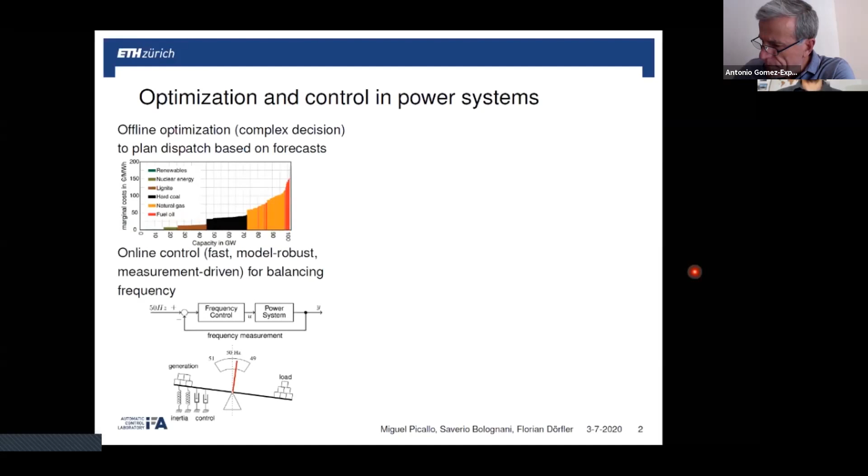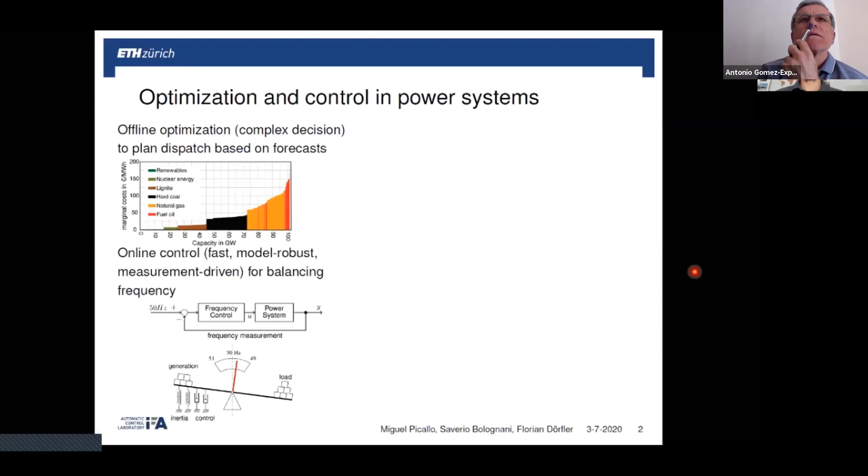There are many examples of optimization and control in power systems. For offline optimization, which consists on solving a problem to take complex decisions, we find an example in the day-ahead plan to dispatch based on forecast. An example for online control, which is fast, model robust, and measurement driven, is, for example, the primary and secondary response for frequency balancing. So those are two examples of separate optimization and control in power systems.

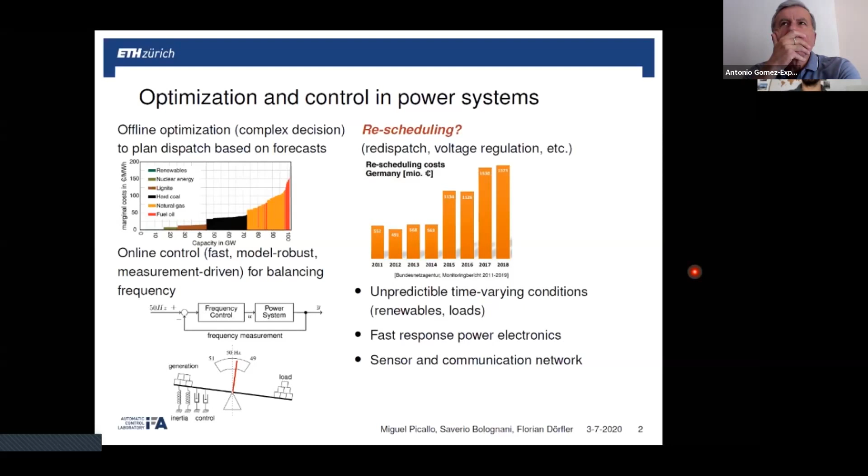But what about, for example, rescheduling, the redispatch of set points and voltage regulation? Due to the increasingly unpredictable and time-varying conditions caused by the increasing amount of renewables and the unpredictable loads, the cost of rescheduling is increasing. However, we have to our advantage an increasing number of fast response power electronics and a more available sensor and communication network, which can help us to lower this cost and perform better.

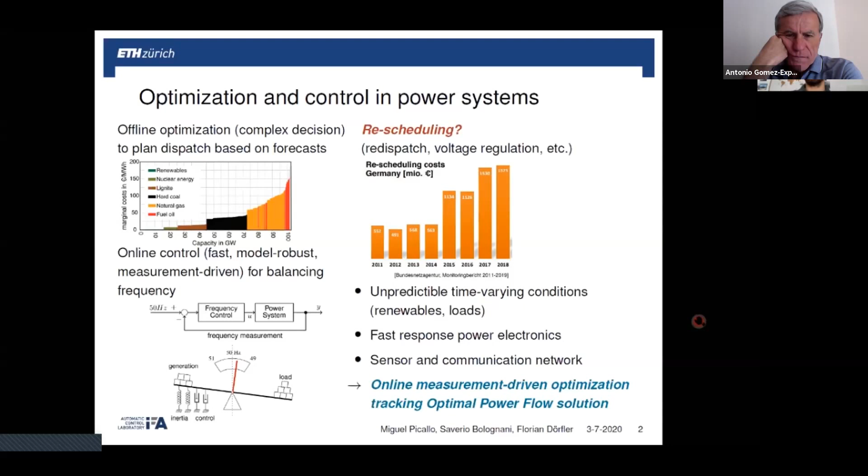So the key is how can the advantages of offline optimization and online control be combined to create an online measurement-driven optimization that would be able to track the optimal power flow solutions in real time.

In the context of distribution grids, there are even additional challenges. The integration of renewables is much higher there, so the share of renewables over traditional generation is higher. Also, apart from these unpredictable renewables, fast time-varying demand in the loads also causes these sudden changes. Moreover, the models in distribution grids are less accurate, and there is a scarcity of sensors and actuation. In this sense, such an online optimization could be helpful to mitigate these uncertainties and fluctuations.

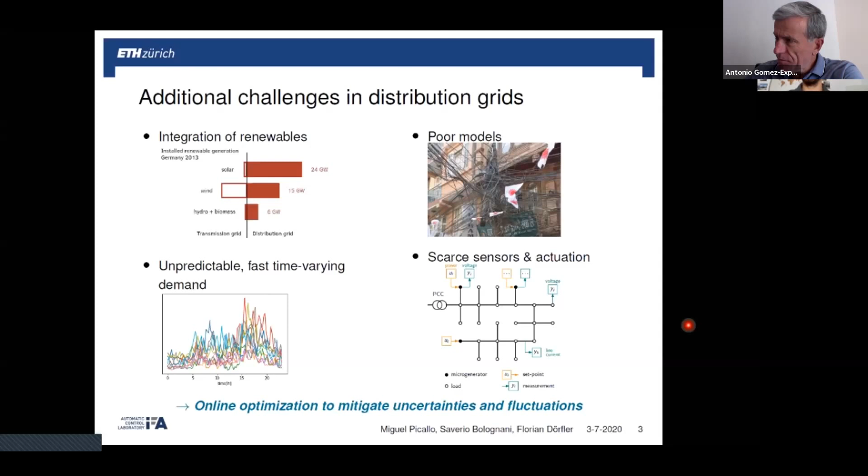Now, if we consider the set points of the controllable power injections as inputs, the node voltages as the state of the system, and the uncontrollable loads and admittance matrix as parameters, we can define the AC optimal power flow as follows. The objective is to minimize the operation costs, some function of the power injections, and enforce grid constraints, like voltage violations, while satisfying the steady-state grid AC power flow laws and the available power capacity. That means, for example, that the power from the power injections has to be between a lower and an upper threshold.

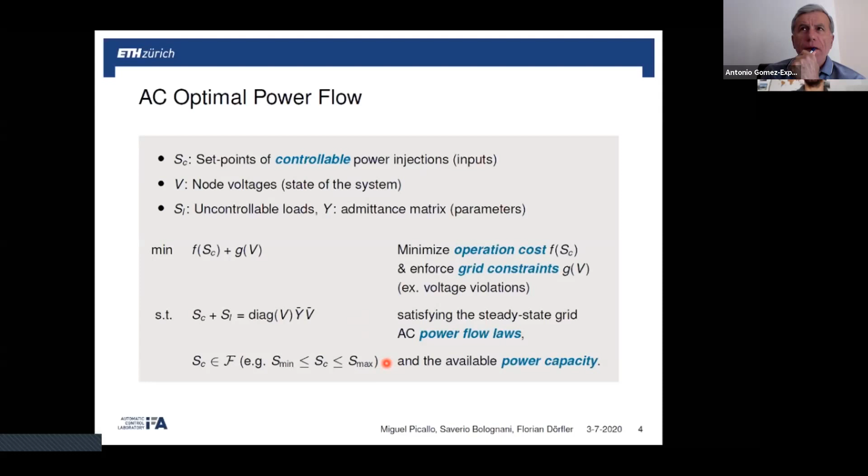To solve this problem, online feedback optimization is a recently proposed approach which has attracted a lot of interest, and it can be used to solve the AC optimal power flow in real time using measurements. It consists on taking measurements of the node voltages from the physical system, updating the set points of the power injections, saturating these set points in order to satisfy the power capacity, and sending the set points back into the physical system.

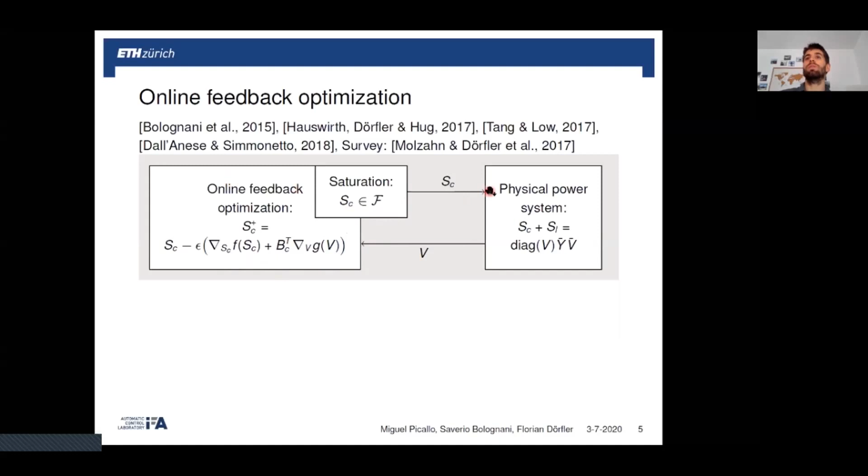This approach has several advantages. For instance, it produces feasible inputs, feasible power set points at all times. It doesn't require power flow computations, only measuring these node voltages V. And in terms of a model, it only requires the sensitivity of the voltages with respect to the power injections, such that it's more robust to model errors and time-varying conditions. More importantly, under some conditions, it can be proved that this approach converges to the optimum of the AC optimal power flow with time.

However, there is an underlying strong assumption in all these approaches, which is that the node voltages V, the ones that we want to control, are all measurable. But what if they are not? For example, in distribution grids, the measurement scarcity may render the system unobservable and not all the node voltages may be measurable. In that case, we need something like an online state estimation to keep track of these node voltages.

Now, how to build such an online state estimation? If we consider all the measurements we have available from different sensors, like SCADA measurements, smart meters, phasor measurement units, etc., even with those measurements, which can be of different sorts, the system may still be unobservable due to the measurement scarcity. To compensate that, we can use pseudo measurements, which are inaccurate load predictions created using the average or nominal load profiles plus a high variance noise.

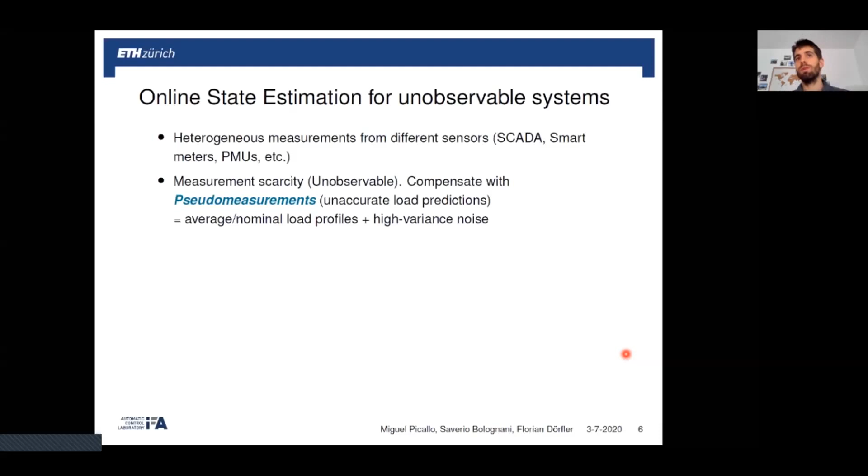With these measurements together, we can make the system observable and use a Kalman filter to create a dynamic state estimation that is able to handle uncertainty in the measurements. Such an estimator would take the noisy measurements as input. It would update the state estimate and the covariance of the state estimate using these update rules, and it would produce a state estimate V hat.

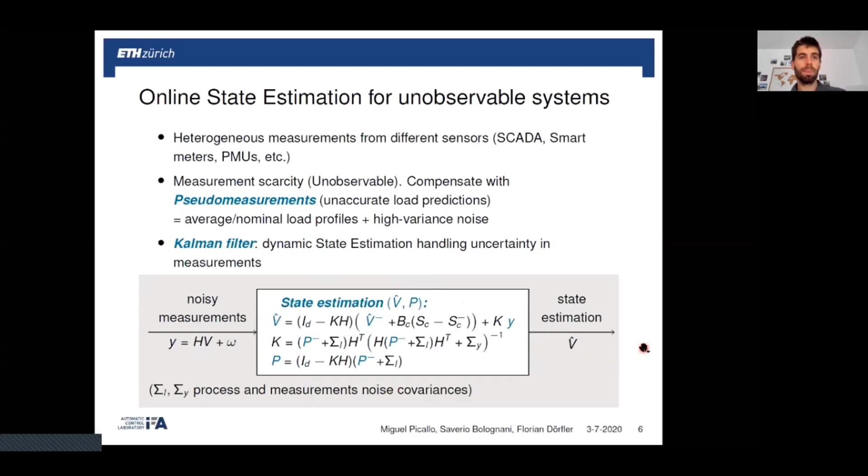Back to the online feedback optimization scheme, the state estimation would fit as follows. Now, from the physical system, we would receive the measurements. The state estimation would update the current state information based on these measurements to produce a more updated state estimate. This state estimate would be sent back into the system here to update the set points.

These set points then are saturated to satisfy again the power capacity constraint and sent back into the system, and the state estimation such that it can take into account the update of the set points. Again, this approach has some of the advantages that the previous online feedback optimization without state estimation had. For instance, this also produces feasible inputs at all times.

It doesn't require power flow computations, only the measurements Y. And very importantly, it does not require to measure the full node voltages, but only the measurements Y. Again, it only requires the sensitivity of the voltages with respect to the power injections, so that it's robust to model errors and time-varying conditions.

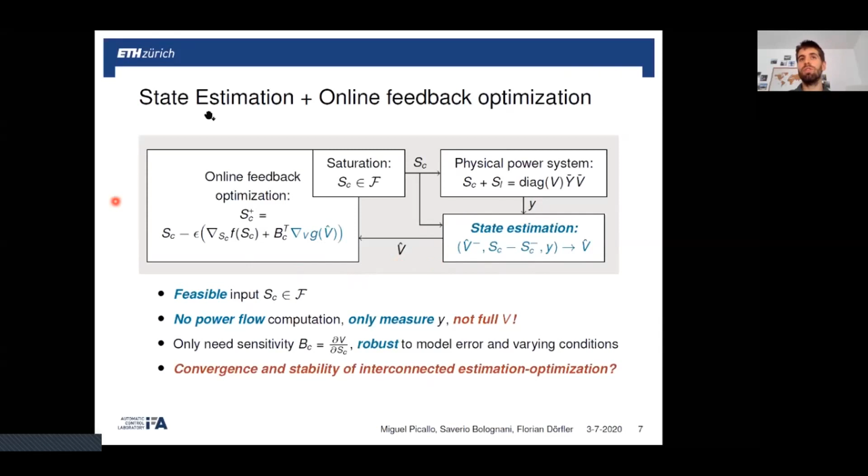However, it's not clear yet whether this interconnection of state estimation and online feedback optimization converges and is stable around the optimal. Why? Because the including of a state estimation, which has its own dynamics, could hurt the convergence and stability of the whole system. To answer that question, we have the following result.

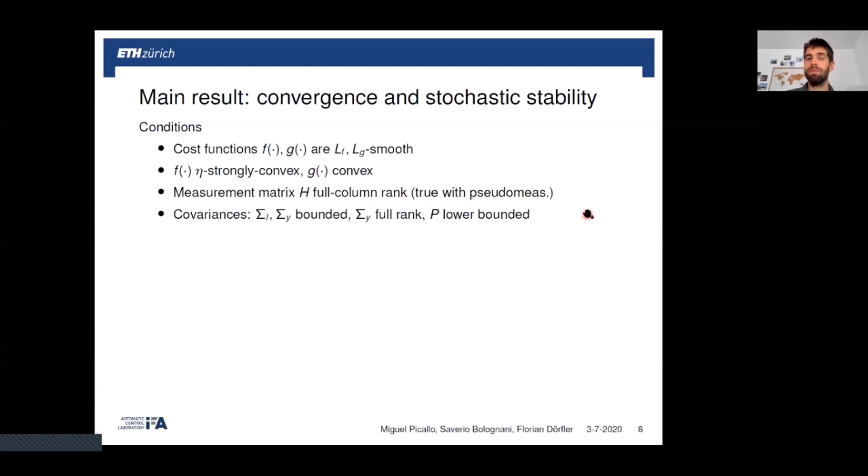Under some conditions, namely that the cost functions f and g are L-smooth, that the cost function f is eta-strongly convex and g is convex, that the measurement matrix H is full column rank, which is true if we consider pseudo measurements, that the noise covariances sigma L and sigma Y are bounded, sigma Y is full rank, and the covariance of the state estimate is lower bounded, we have the following theorem.

First, there is a separation principle. So the Kalman filter and the gradient descent optimization from the online feedback optimization can be designed independently. Second, if we choose a small enough step size in our online feedback optimization, this interconnected estimation optimization converges and is stable.

Converges in the sense that the norm of the expectation of the estimation error and the optimization error both converge to zero. And there exist two constants, CV and CS, such that the expectation of the norm of the estimation error and the optimization error converges to a value less than infinity. So a value that is bounded.

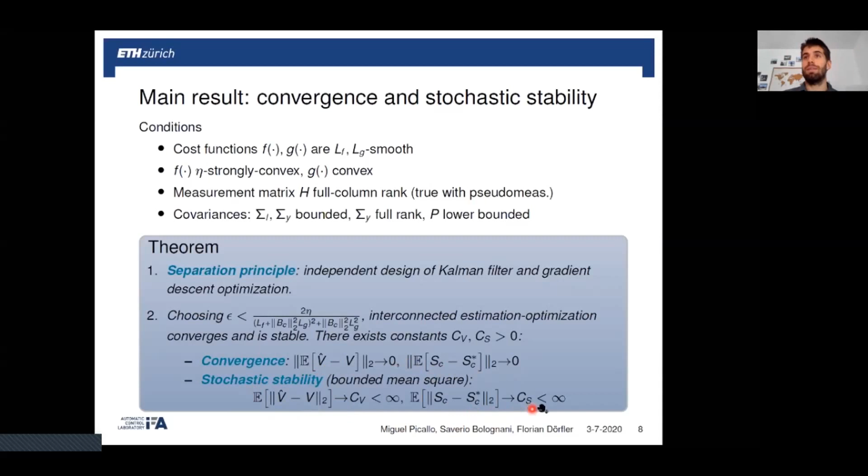Why these two are different, in the sense that the expectation and the norm change places: in a sense, this is saying that the bias of the estimate and the bias of the optimization is going to zero, but that the covariance of the estimation and the covariance of the optimization error go to a value that is bounded, which means that it is less than infinity.

We have tested this approach in a simulation using the IEEE 123 bus test feeder, which is a three-phase unbalanced test feeder. As consumption data, we have used 1-second resolution real household load profiles, so that it's a fast time-varying consumption. We have used real solar radiation and wind speed data to simulate distributed generation in certain nodes of the network.

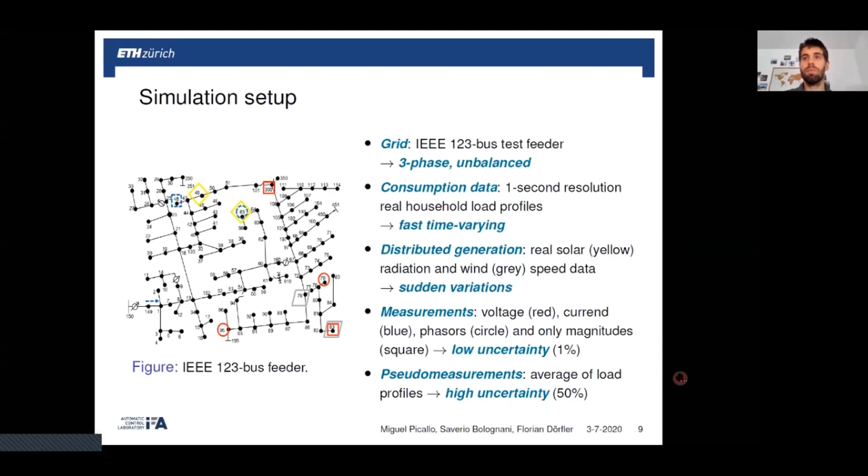And we have put some measurements in the network, but not enough to make the network observable. These measurements have low uncertainty, but they need to be complemented with pseudo measurements, average load profiles, which are highly uncertain. The first thing we observe in the estimation is that it converges very quickly to close to zero and remains close to zero. So the estimation converges very, very quickly.

The optimization does not converge as quickly, but still converges, even in time-varying conditions. We can see from the maximum power available here that the conditions are changing, but we can see as well that the error between our set points and the optimum goes to zero. And our proposed set points are able to track the optimum, which uses all the information.

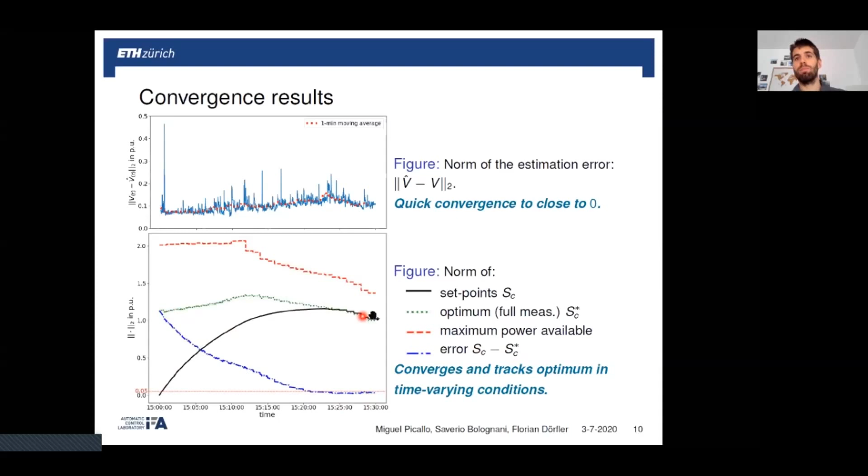As a conclusion, we can say that with our scheme with the online feedback optimization, the physical system, and the state estimation, we are able to monitor, optimize and control the unmeasured states. Moreover, we are able to prove that this interconnection of estimation and optimization converges and is stable around the optimum. And we have also successfully tested this approach in simulation.

As future work, we would like to consider nonlinearities in both the power flow and measurement for the proof of convergence and stability. We would also like to consider biased noise, like load trends in the prediction, meaning one case would be that the load would be following a trend that we can predict, and we can use that information also to perform better.

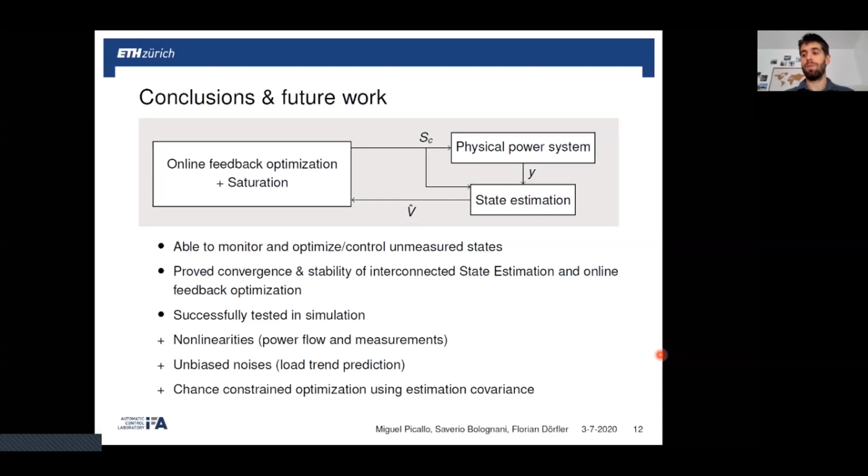So while they try to encourage questions, I have a couple of questions for you. The first one is, what about the robustness of the overall stability against bad data? I mean, you may have outliers in the measurement. Can they destroy the convergence? No, but that's a very interesting question, actually.

In this case, since we already had only very few measurements, it's also very hard to identify bad data, because mainly you don't have enough measurements. You don't have the redundancy here. So in this case, this bad data could hurt the convergence of the whole combination quite badly. Yes.

Okay. Basically, the question to answer here would be, how can we perform bad data analysis in a scenario where we have only few measurements? Well, it's a bit more complex probably, because a colleague of ours, Lamine Mili, and his students have been working with robust state estimation, capable of addressing leverage points and this kind of thing. So this is a little bit more complicated.